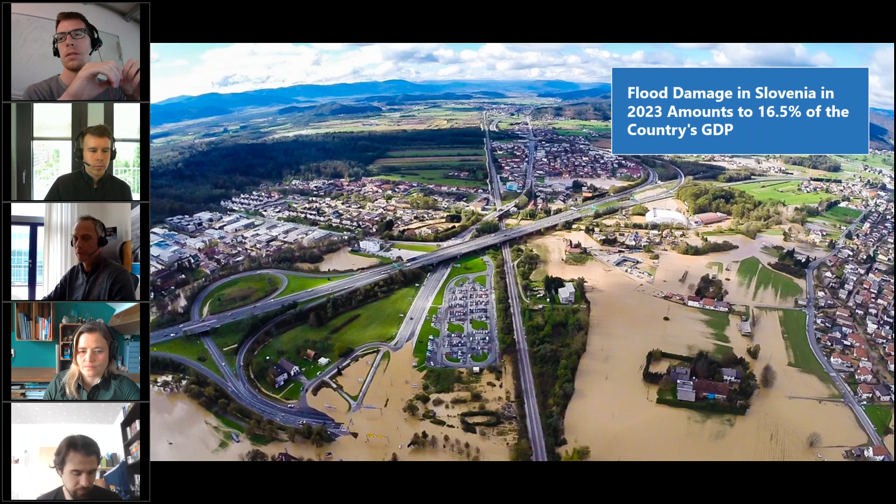And it's not just our Slovenian local challenge. You know that across Europe and around the world, extreme weather events are becoming more and more frequent, more intense, even more disruptive. And this experience motivated us to check how we can contribute actually in this field of flood protection. And we believe that the best way to move forward is by connecting expertise across multiple disciplines.

And this is why today's session brings together specialists in measurement technology, hydraulic modeling, meteorology, infrastructure design, and we want to share tools, knowledge, some real-world examples that can help all of us better prepare for future flood risks.

So I would like to welcome my colleague panelists, Tomáš Púčik from European Severe Storms Laboratory in Vienna, then Katja Weber. She's application development manager at OTT Hydromet, a company that designs measurement equipment. Martin Nagel, I hope I spelled correctly, Martin. He's a hydrologist and advisor at DHI. This is an institute that develops solutions for hydraulic simulations and applications. And then also my colleague, Jan Cunja, he's product manager for hydrology solutions at our company, CGS Labs.

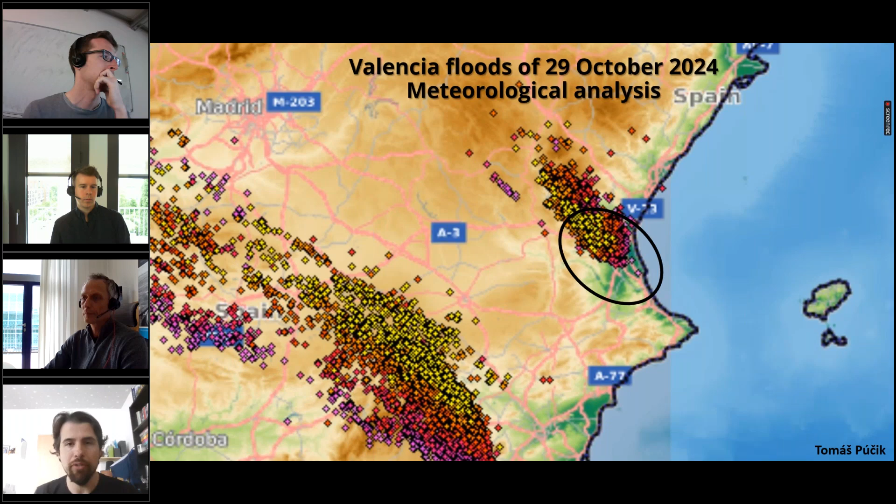And here what you can see is an animation of the lightning strikes over the course of the flash flood event. And these yellow crosses that you can see are the lightnings in a 5-minute period. And you can see how they are accumulating basically over one spot. So we had the storm residing over the Valencia area for several hours straight, a very intense storm. And then by the end of the animation, you can see that this storm begins to just very, very slowly creep out of the area, but it was hovering there for many hours.

But it was also during a prolonged amount of time, because in some of the storms, it rains very heavy, but not for a very long time. In this case, for example, in 30 minutes, there was more than 100 millimeters of rainfall, or 100 liters of water per meter squared. That's like an equivalent unit. In 1 hour, more than 180 millimeters of rainfall.

Now, what is tremendous about this, of course, is that if you imagine that there are many places in Europe where the annual rainfall is less than this, a majority of these 700 millimeters fell in a 6-hourly period. So imagine your annual rainfall falling in 6 hours of time. So that is something really, really incredible.

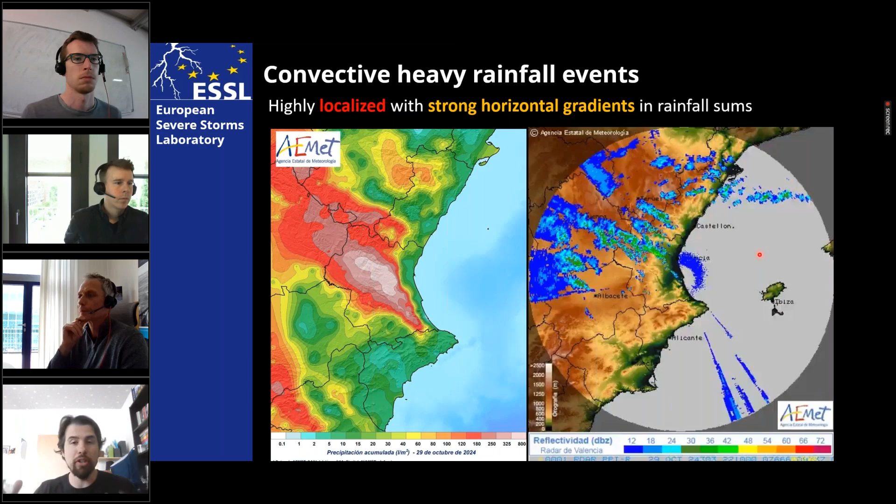Now here I'm animating a weather radar from the location, and you will see the development of this band of heavy rainfall over the area. And then you can see that first of all, it resides basically over one location, but also look how narrow the zone of the rainfall really is. So of course, if the rainfall moved 20 kilometers to the west or to the east, the situation and the impacts would be very different. They would move from one area to another.

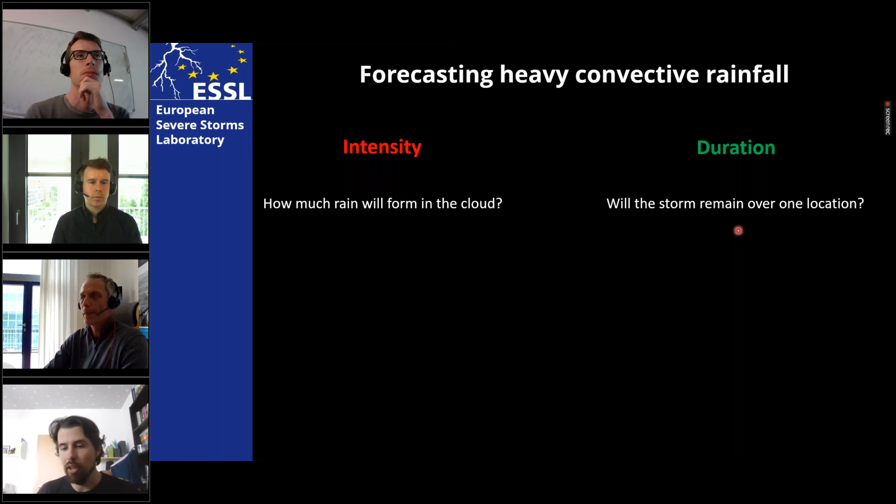How do meteorologists approach forecasting heavy convective rainfall? Well, we try to split it into two different components. The first is forecasting intensity and then the duration. So for the intensity, we are asking ourselves how much rain is going to form in the cloud. And for the duration, we are asking ourselves, will there be conditions that will enable the storm to remain over one location, so that a huge amount of precipitation can fall for a prolonged amount of time, so that eventually we are getting into these rainfall sums exceeding hundreds of millimeters.

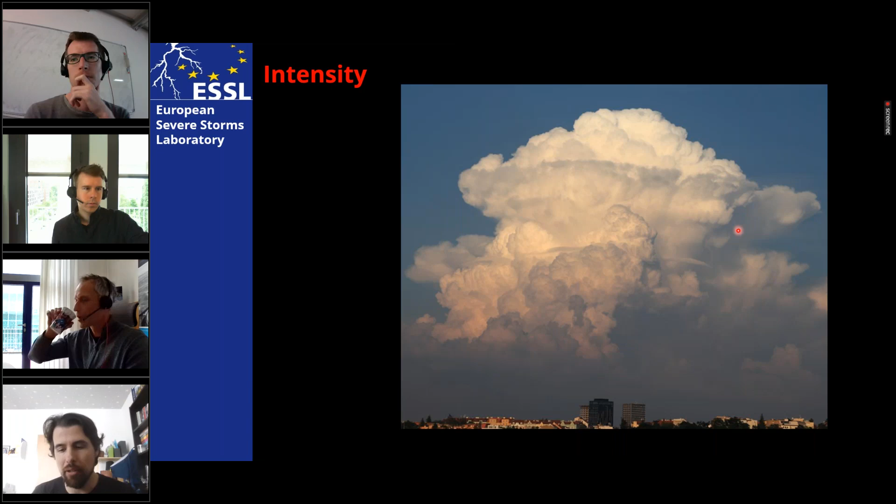Now, what about the intensity? So here we are looking at the photograph of what we call a cumulonimbus cloud or a storm cloud. And what these clouds are comprised of are very powerful updrafts. So there are actually measurements of the updraft speeds that are reaching 50 to 70 meters per second. So imagine the air in these storm clouds can rush faster than how you can drive on your highway.

Well, except if you're in Germany, right? Then you can drive very fast.

But the air really rushes up very fast upward in these storm clouds. So we flux a lot of water vapor up, and we can have really tremendously intense rainfall formation processes in this cloud. What will the intensity depend on? Well, first of all, there is some air flowing into the storm: how much water vapor availability there is in the inflow to the storm. So what is basically the water content in the air near the ground?

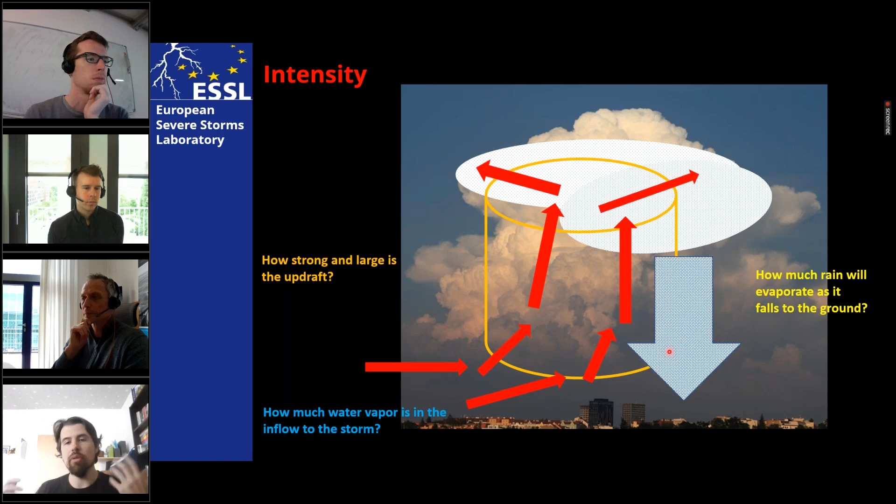Then how powerful these updrafts in the storm clouds get. So how much vertical flux of water vapor there is, and this scales both with the updraft speed but also the size of the storm overall. And the third factor is if the rain forms in the cloud and it starts falling to the ground, how much of it is going to evaporate. And let's investigate some of these things.

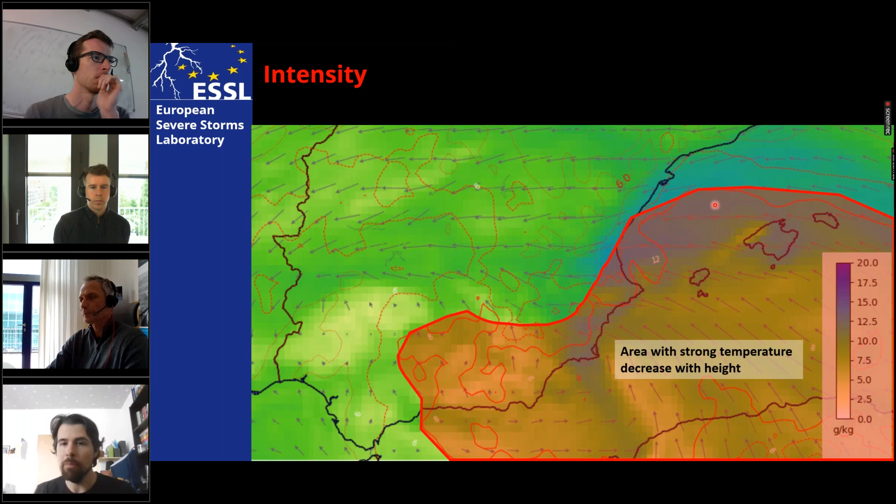Now, what we get of the combination of these two, of the moisture and strong temperature decrease with height, is that there is a high amount of potential energy reachable for the storm. So in meteorology, we have an index that is called CAPE, convective available potential energy, and there was really a lot of it for a long time over the Valencia region.

Then you see this orangish reddish area that you can see in here, and then we have this area that is sort of whitened out, and this is the potential energy that is not actually reachable for the storm. So there is like a stable layer or a lid that would prevent the storms from using that. So exactly over this Valencia region is where we had the best presence of available energy for the storms.

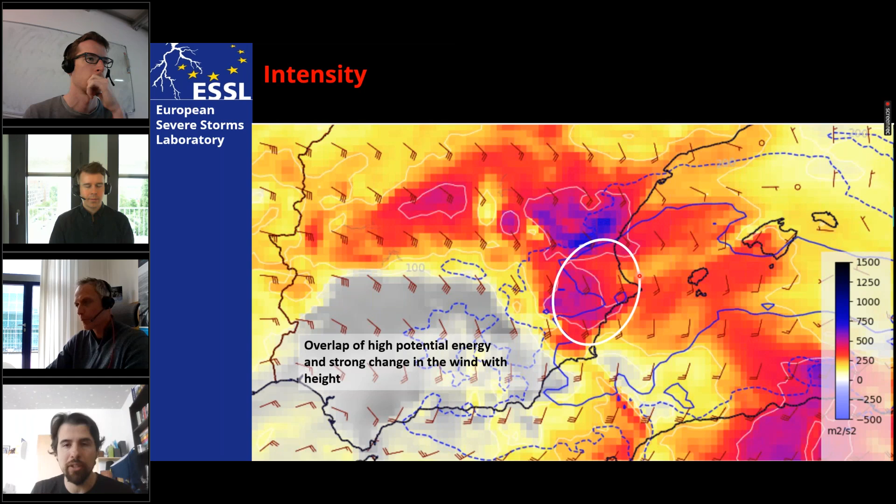And not just that, what we also got over an area was both this high potential energy for the storms, but also an index in these bluish reddish colors that shows that there is a lot of change in the wind with height. This is a condition that we call vertical wind shear, and it profits storms, heavy convective storms, a lot. And why is that?

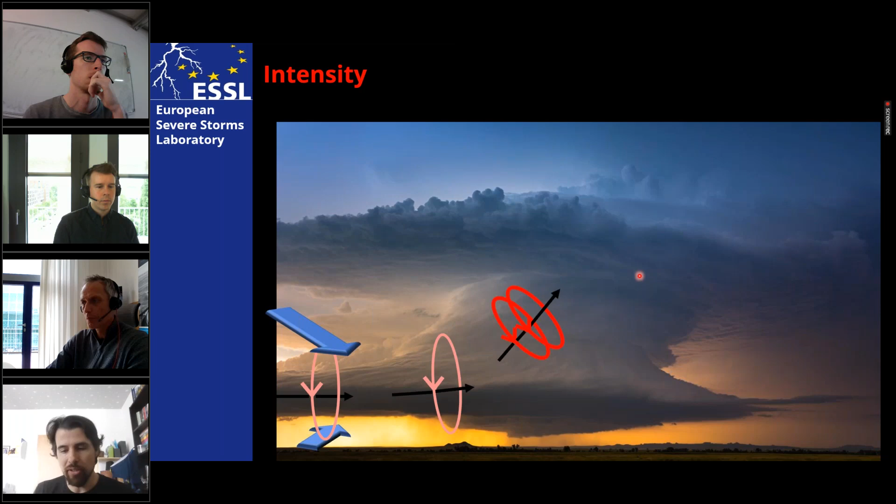This vertical wind shear creates a horizontal tube of rotation, a vortex line, that is ingested by the updraft of the storm, tilted in the vertical and stretched, creating sort of an ice skater effect. And this rotation in the storm is basically like a huge vacuum cleaner. It sucks up the air from below. So in the end, the updrafts of these convective storms, when we have rotation in the storms, are much wider and more intense compared to the storms that do not rotate. Once again, it's like a big vacuum cleaner when the storms begin to rotate.

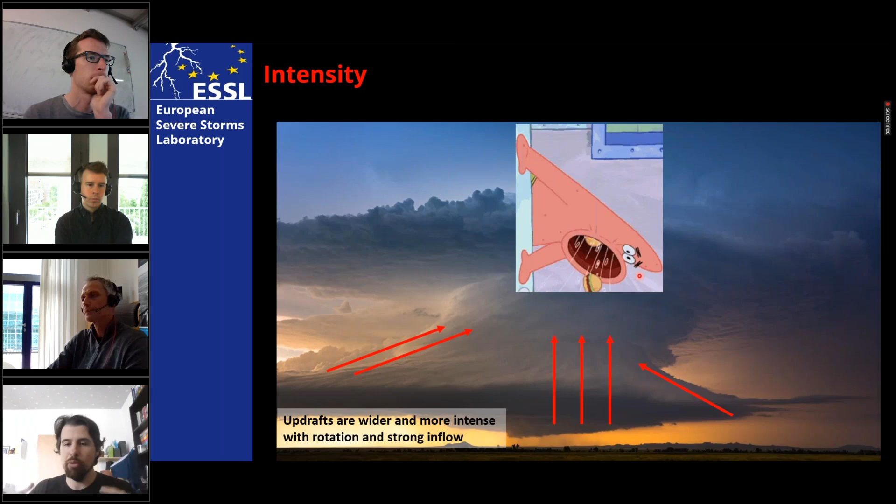So also there was very strong vertical wind shear in the environment, and the storms that were developing were really sucking up a lot of this moist air upward. So we had a tremendous vertical flux of the moisture. Now, what about the duration? That is a big thing. We had very intense storms. And now, what about the duration?

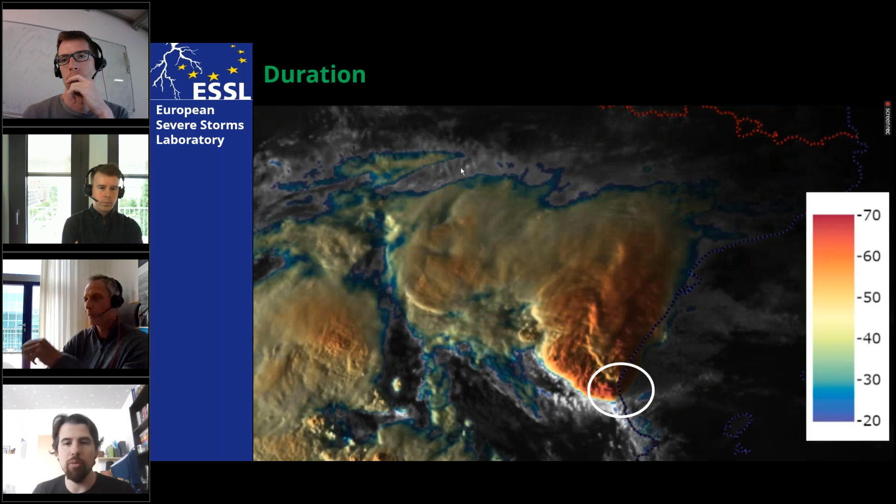So I'm now animating the satellite imagery where these colder colors represent very cold, very powerful storm tops. And you can see that the reddest colors stay precisely over the same location. I will animate once again so that we can get an overview. So once again, track the reddest color in here. So we see that the strongest updrafts in the storm were sitting exactly in the same spot for several hours. And this is what in the end made the situation so tremendously dangerous.

How do we get this high duration of the rainfall? There are a number of ways. One of them is whether we have these favorable ingredients for the convective storms or for this heavy convective rainfall remaining over one area for a prolonged amount of time. And this is precisely what happened. We have this flow of very moist air coming from the Mediterranean Sea over the area, basically for the majority of the day. And now let's notice the physical geography of the region.

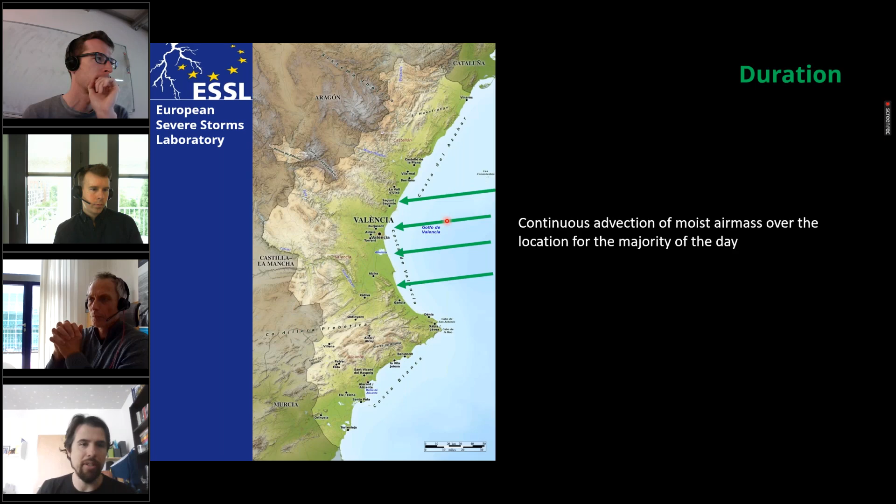So we have this moist air flowing towards the Valencia region, and of course we have local terrain. And what is especially important for us are these small mountain chains over here, because these actually started triggering the first storms, and then the storms that formed tracked over the Valencia region. So what happens? We have moist air coming towards the mountains, and the mountain is a barrier. So the air that approaches it has to go up. And as the air goes up, this triggers the development of the storm. As the air is forced to rise, this starts the release of this potential convective energy, and we get a storm. And it can rain over the mountains.

As long as we have this moist air flowing towards the mountain, the storm can basically hover over it for a lot of time. Or what we can get, of course, is the storm - because it rains and some of the rain evaporates, the air gets heavier underneath in this precipitation area, and it collapses down. This is what we call a downdraft in meteorology.

Some of this downdraft air can rush down the mountain slopes and out from the mountains. Now remember, we still have this very powerful flow of air rushing from the sea towards the mountains, and you can imagine what happens when this outflow from the storm hits the inflow from the sea. Because of mass continuity, we cannot send the air underground, so we have to create an updraft. On the zone of this low-level convergence, we have a cloud formation, and this serves as another trigger for the storm.

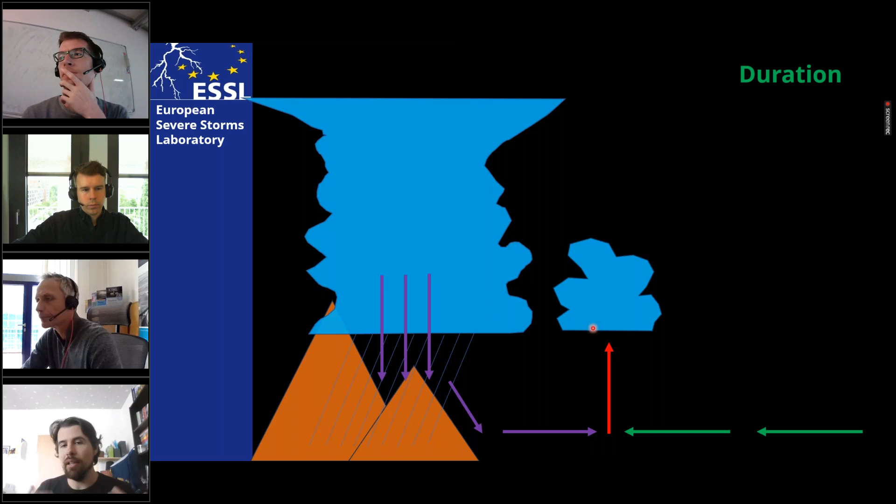If the wind direction stays the same and the situation doesn't change, and this trigger for the storm stays at one location, we will have this situation where we have the formation of new storms over this spot, and then the maturing storms with very heavy rainfall will continuously move from this spot over there.

If we have this moist flow of air, and if we have these convergence zones residing over an area for a couple of hours, then we are getting heavy convective rainfall for a couple of hours. And this is, by the way, precisely what happened in this situation.

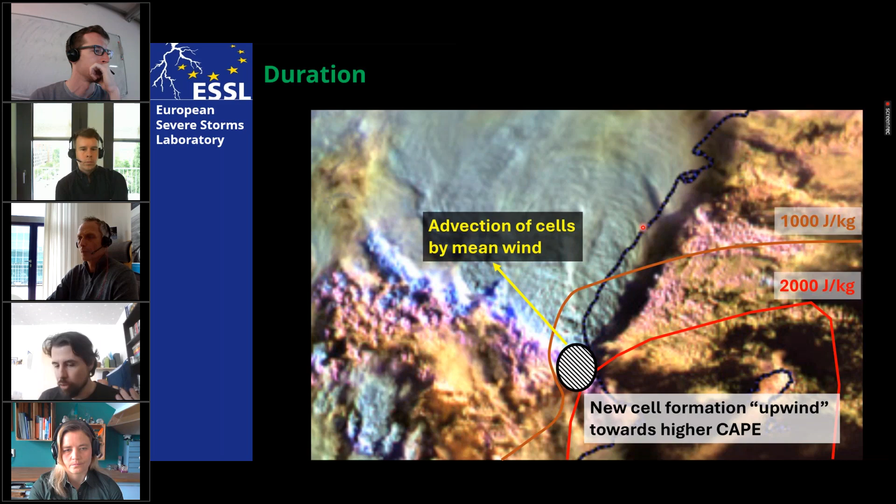So we had this air filled with high energy, 2000 joules per kilogram of convective available potential energy, or what we call CAPE, rushing from the sea, towards the Valencia region, and then the orography triggering the convective development at this spot for several hours, and then the storms being carried by the mid-tropospheric wind further inland and deeper into the mountains. But if the situation with the favorable inflow of air persists for many hours, then it will rain for many hours.

Now this is a bit more of a description of what kind of ingredients for heavy convective rainfall meteorologists would be looking at. So concerning the intensity, as we said, we are looking at the high water vapor content in the atmosphere. We look for sufficient energy to sustain strong updrafts. Then we look at whether we have strong vertical wind shear present, and the low cloud bases.

I can explain this for low cloud bases. This is important because if we have a very low cloud base, then the rain that falls out of the cloud base and heads towards the ground will have little time to evaporate. If we have very high cloud bases, like in some very continental clouds, then a lot of rain is going to evaporate on its way to the ground.

And then a high level of the 0-degree isotherm. That is quite interesting, but it is actually sometimes quite important, because the higher the level of the 0-degree isotherm is, the bigger the portion of the cloud where we will actually have a formation of raindrops. If the 0-degree isotherm is very low, then the storm will be in this very cold part of the troposphere, and instead of raindrops, we will be forming more ice crystals in the upper part of the storm.

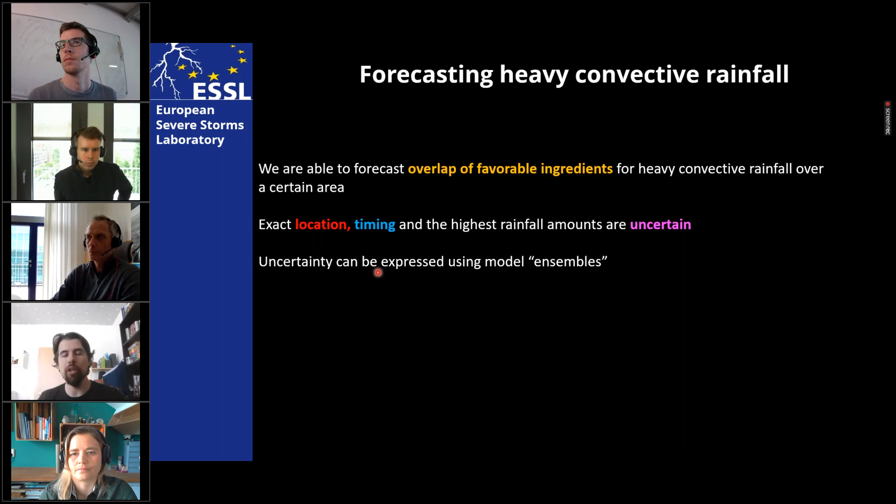What we are very good at nowadays is saying that this is a situation that may really produce very heavy rainfall. Okay, so thank you for your attention.

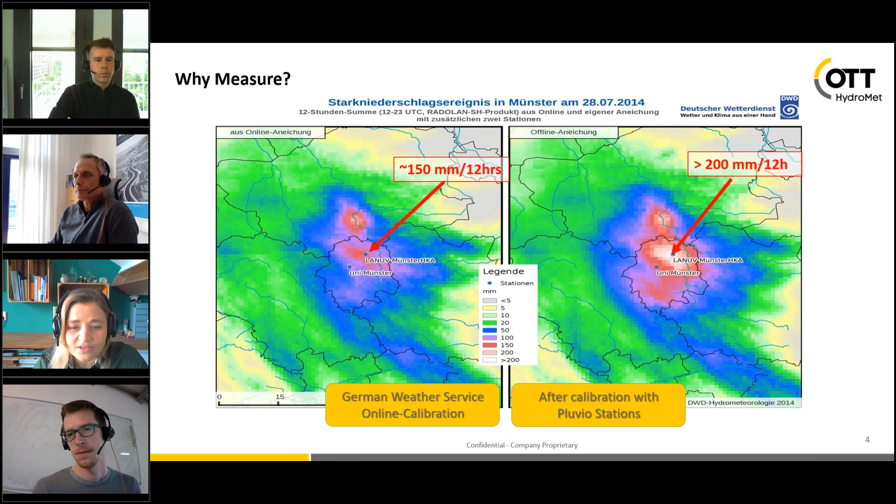This is a precipitation sensor with the weighing principle. I like to highlight the detail with the clothes in the background because there was a heavy rain event. People had to be out. So what actually happened in the end was almost 300 millimeters in 8 hours. That's quite a difference to what was forecasted. And that difference could mean that your emergency service would be completely surprised by what is going on.

I also have this nice example, since we might have people in the call that are not so familiar with precipitation amounts. Almost 300 millimeter means almost 300 liter per square meter. And this is what they put together here in buckets on 1 square meter to give you a visual impression of how much water that was in 8 hours. And if you think that you were about 100 millimeter off because you expected more than 200 and in the end it got 300, that would be almost a complete layer less.

Okay. And that amount of water would not stay on that square meter. That is the difficult thing about flood risk management. The water doesn't stay on the square meter where it's falling as precipitation, but it will move downhill, and at some lowest point, it may accumulate. And this is where you suddenly get a problem because you get a few of those layers more than you expected. So as I just said, that could surprise your emergency services, which would then waste potential time and resources in responses that are not actually fit to the amount of water.

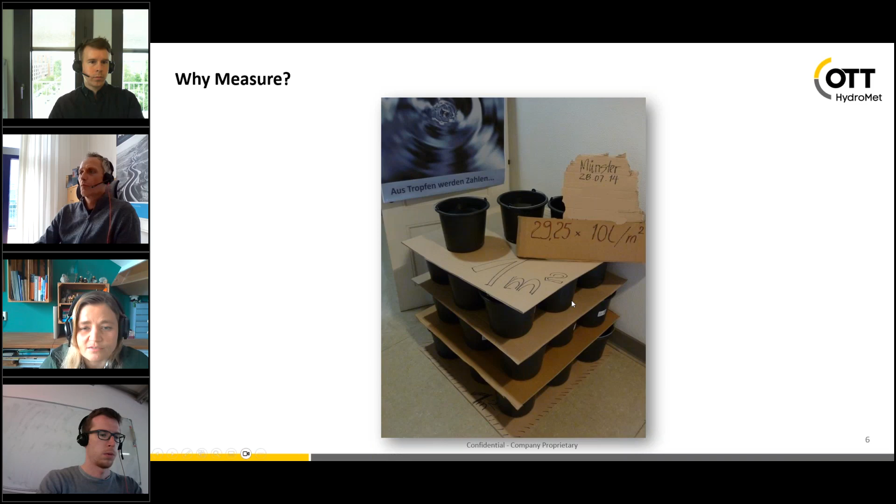Or think about insurance claims. If an insurance has to pay or not, afterwards they might say, yeah, but we don't have to pay because the event was not that exceptional. And if you can prove that at this specific location, it was 100 millimeter more than what they said in the forecast or what the German Weather Service predicted, then they will have to pay. But without the data that you measured, you might not be able to prove that. So there are a lot of reasons why it's important to have sound information.

So again, the best option is to use a combination of things to get the advantages of all the different systems and cover up for the disadvantages that they might have. It's a bit unfortunate that there's not one perfect solution, but that's why we're here today to talk about it. But let's start with some examples of what can you measure, how can we measure it?

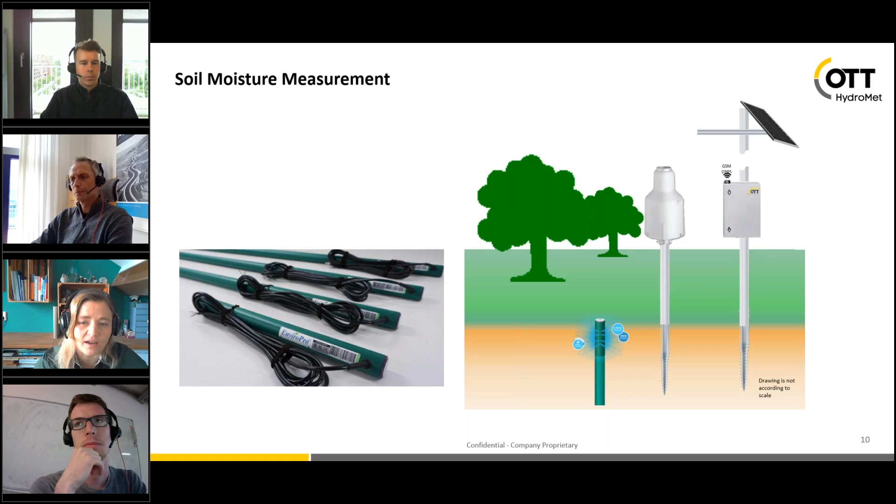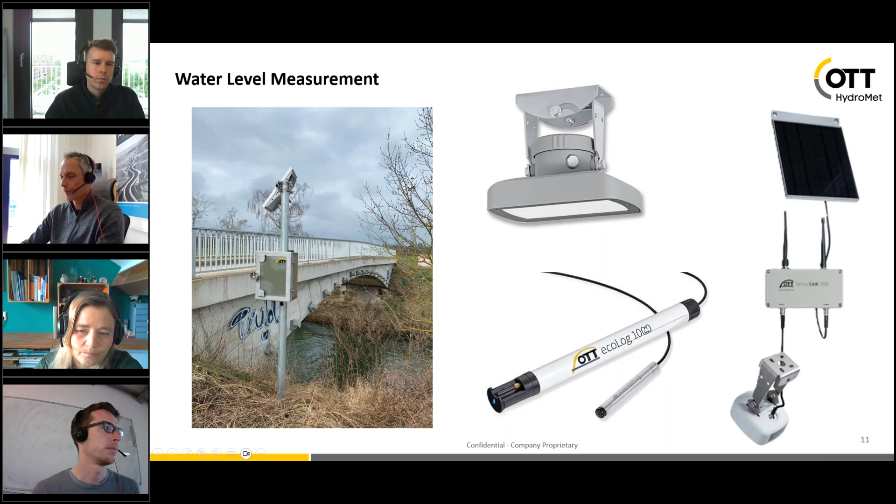So these systems are very compact, and they have the huge advantage of being compact and simple. They are ready to go. You don't have to plan anything more. They have the disadvantage of what you see is what you get. So if you want to add other sensors or anything, you can't do that. It's just this setup. But yeah, this setup is specifically made for basic water level measurements that you can install pretty much everywhere.

You can do it even more simply. If you don't want to use screw foundations, use a wooden pole. So you see, you just need to be a bit creative. All you need to manage is get the sensor into the water and make sure that the data logger part stays dry. These are the two important things. For the rest, you can have a lot of ideas how to install that and how to mount that.

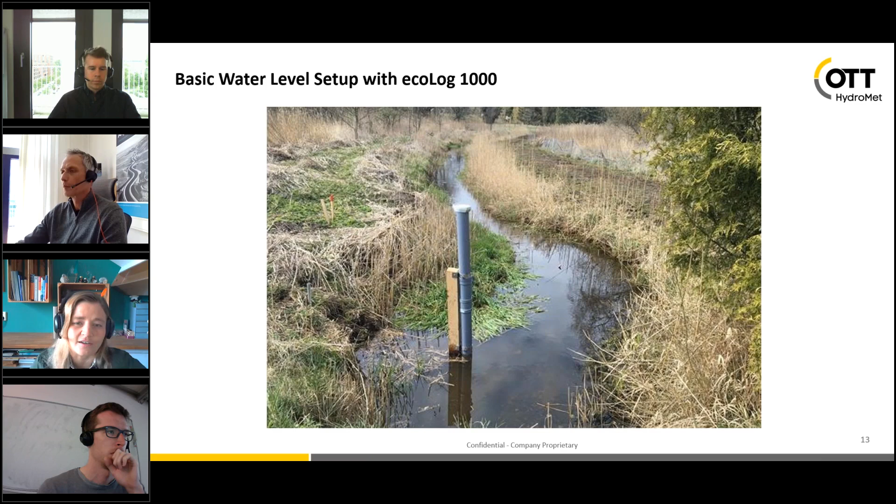So the sensor needs to be over water. The rest could also be installed somewhere else, wherever you would want. So that is really a high flexibility. This is then easily accessible for maintenance, for example, or for installation. And sometimes you might even want the camera.

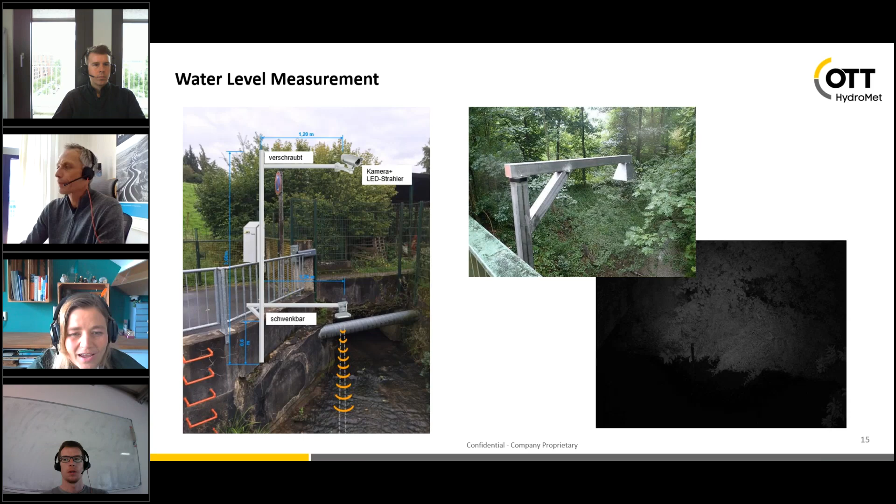And we again have a radar sensor. A rain retention basin usually has an outlet. And you see we have one station on the inflow side of the outlet and one station on the outflow side of the outlet. On both sides, we would measure the water level. And in a heavy rain event, on the inflow side of the outlet, we would get a high water level because the retention basin gets filled.

And then they would also see what is happening on the outflow side. Do we still have outflow, or is the outflow potentially blocked? Because what you usually have is these racks in front of the outflow so that they don't get blocked that easily. But even these can get blocked with debris that is coming along, and then the water can't get out of the rain retention basin. So this is an actual camera picture of one of these two cameras that you just saw in the photograph.

And with that, they can check the situation at their rain retention basin, and they will know if they have to respond, if they have to go there to potentially clean that, if it is safe to go there, if they have to take specific material like heavy machines to be able to clean that. They will exactly know what is going on here and how to respond. And you could also have the same system for blocked culverts that go underneath a road, right?

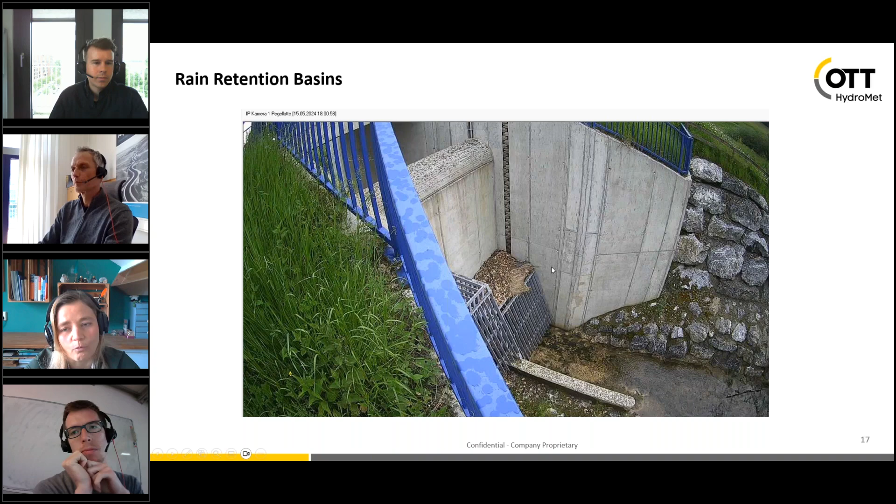Otherwise the road might get flooded because the culvert is blocked and the water can't go through. If you see that in time, you measure a water level upstream and downstream of the culvert, and with that you could respond, get a camera picture, see what's going on, and see if it is worth sending someone there to clean it or not. So that is a very specific application we use quite often, and I thought it would be nice for you, just as an inspiration: where could it actually help? Which benefits do we gain?

Now, the main takeaway that I want to have for you is A, measurements are important to make informed decisions. So don't push them away. They are important and you will need them. The second one is that there is not the one solution, so you will always have to plan it. But many things are possible and not even that complicated. They might seem complicated for you, but for us, it's our daily business. So just ask us. Most likely we are able to solve it, and it might just be a blink of an eye for us because we do it on a daily basis.

So I'm sorry that I went a bit over time.

I hope you forgive me. Thank you, Katja. We'll hurry up to our next presenter.

Switzerland is often called the water castle of Europe, as it includes many lakes and rivers. These lakes have multiple roles, such as water supply, hydroelectric power generation, tourism, transportation, or biodiversity. Some lakes you might know are the Lake Zurich or Zürichsee, the Vierwaldstätter See close to Lucerne, the Neuenburger See, or the Genfer See near Geneva.

What some of you maybe don't know is that most of these lakes are regulated. This means it is predefined how much water will be released, taking into account natural fluctuations, as well as the needs of different stakeholders.

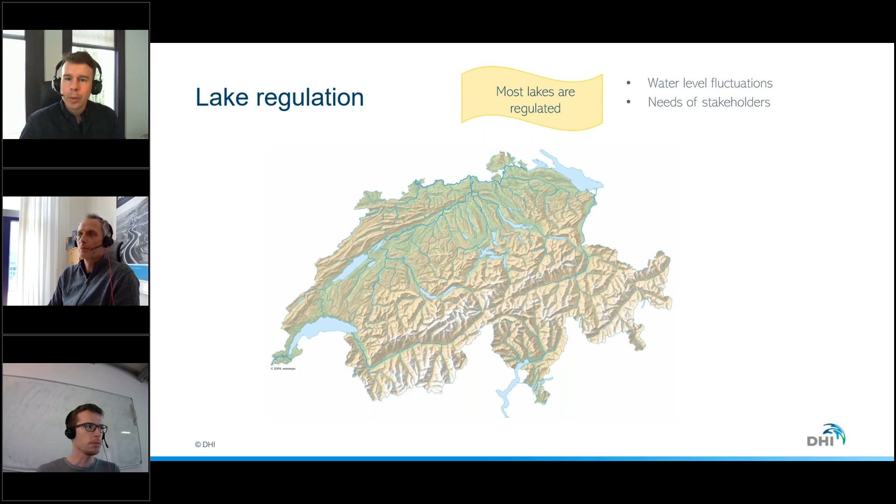Now I'm giving two examples. First, the Lake of Zurich. The regulation happens around two kilometers downstream at the river Limmat. Based on the measured lake level, the flow through the weir is predefined in the rules of regulated discharges. This was historically set up for shipping purposes; however, nowadays it is much more complex and tries to satisfy different needs.

The second example, the Lake of Biel. It is an important lake as two upstream lakes and about a fifth of the area of Switzerland drain through it. Depending on weir regulation, water can flow even backwards into a much larger lake called Neuenburger See. So in total, around two-thirds of the area of Switzerland drains through regulated lakes.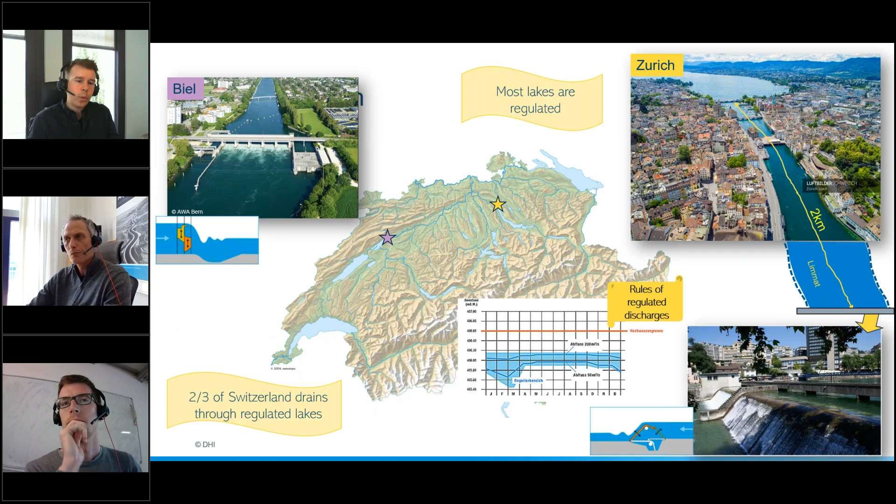So let's look at how these lakes are managed in Switzerland. There are two levels, the cantons and the federal authority. Switzerland has a federal system of government with 26 states, called cantons. The management of these lakes is the responsibility of cantons, and each has their own management strategy, one example being the rules of regulated discharges we just saw.

If more than one canton is impacted by the regulation, there are intercantonal agreements. On top of these cantons sits a federal authority for the environment, the BAFU. According to law, the BAFU has overall supervision of the lake regulation, and in emergency situations it is responsible for flood warnings and has a say in the deviation from discharge regulations for many lakes.

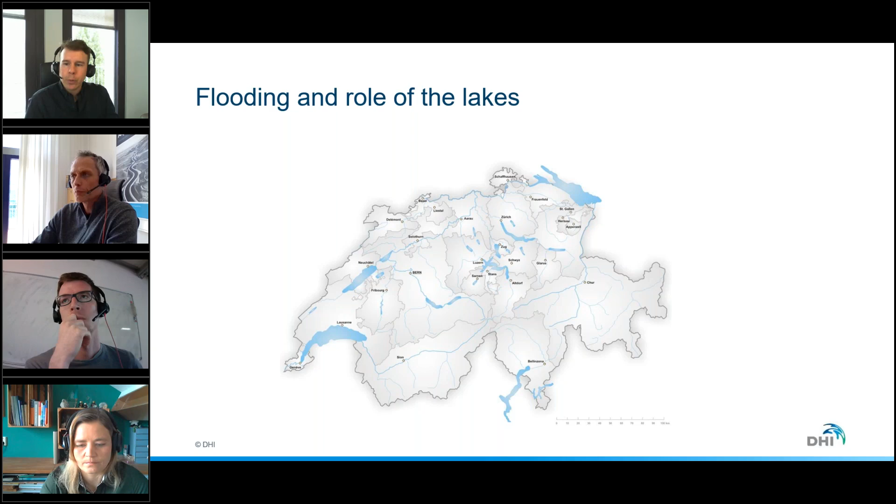There were some big rainfall events in Switzerland in the past, which led to flooding and severe damages. The biggest impacts were seen around the lakes at the northern verge of the Alps and along downstream rivers. After analysis of flood events, it was found that the regulation of these lakes can play a crucial role, because the timing and quantity of lake outflows can influence the magnitude of damage.

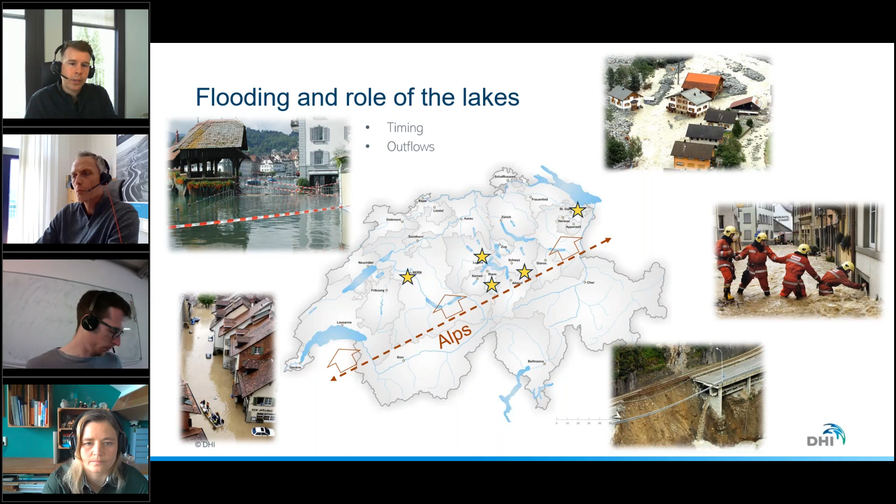For example, in advance of a potential flood, lowering the lake level to gain additional storage volume can help reduce the near-lake and downstream flood risk. As the crucial role of the lakes was understood, the BAFU identified a need for operational flood management. Many lakes are connected through rivers and canals, and the forecast of magnitude and timing of flows can become complex.

I'm giving one example that shows the complexity around the Lake of Zurich and the need to look at the system holistically. Here's Zurich at the bottom, with the downstream weir over the river Limmat and a big catchment upstream which drains through this weir. But it's not only the Lake of Zurich which contributes, but also a second lake further upstream called Walensee, connected through a canal and located in different cantons, St. Gallen and Glarus.

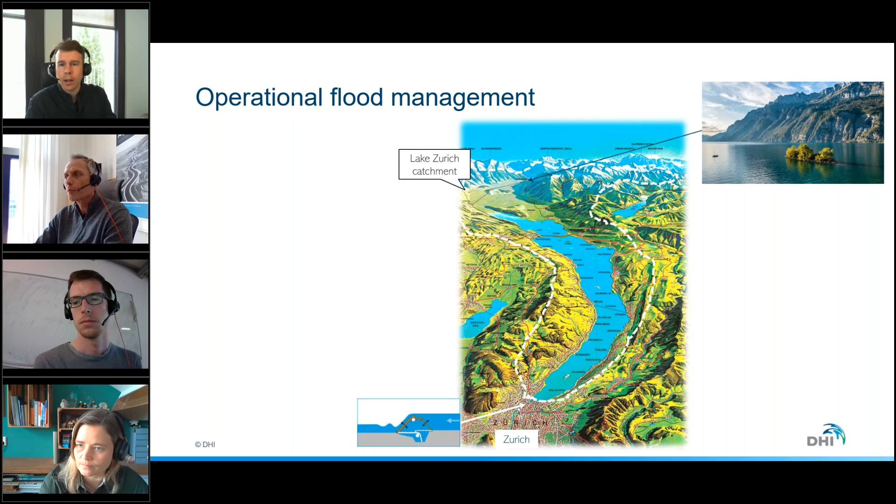Right downstream of the weir is a junction of the Limmat with its largest tributary, the river Sihl, which has a significant, almost alpine catchment. This means river levels can rise very quickly, conveying a lot of water into the Limmat that can lead to further flood risk in Zurich and downstream. To dampen the peak in the river Limmat, the weir can be increased, meaning the Lake of Zurich holds water back.

Now, if we travel downstream along the Limmat, we meet the river Aare, and this Aare gets lots of water from other cantons, for example from Bern and the region around Bern. So any hydrograph we see here is partly an outcome from the regulation around the Lake of Zurich, but also at different regulated lakes around Bern. So you can see that we cannot just look at one canton or lake in isolation, but need to look at the entire country. So holistic lake outflow management becomes crucial for countrywide flood management in this case. And that's why we identified the need for operational regulation and forecasting and engaged my company, DHI, to develop such a system.

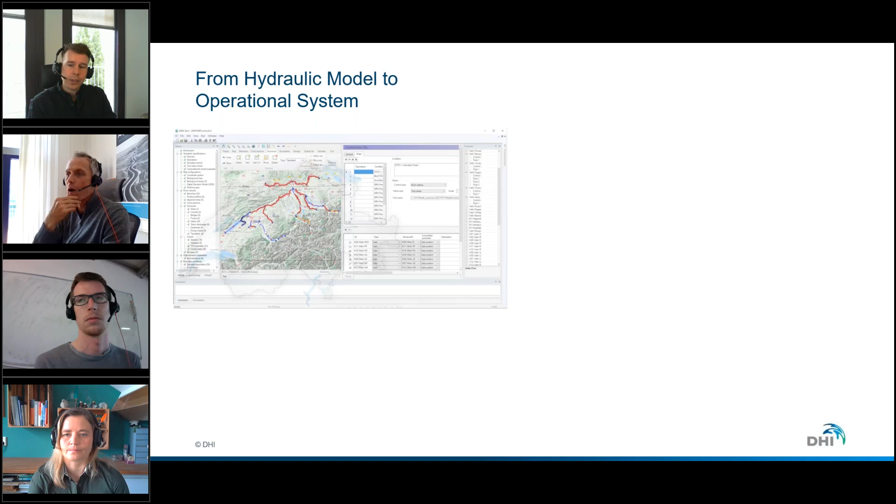So the start of the operational system is a 1D hydraulic model. It includes regulated lakes and downstream rivers. Lake regulation has been implemented as gate structures with specific control rules. This hydraulic model was then integrated into an operational system, ultimately being one of several components. Over time, a powerful decision support system was established, making continuous predictions of water levels and flows for the entire country up to 10 days in advance. There's a back-end component called MIKE Workbench, which is mostly handled by me and my team, and a front-end component called MIKE Operations, which is mostly used by the BAFU. And of course, everything is connected through a database.

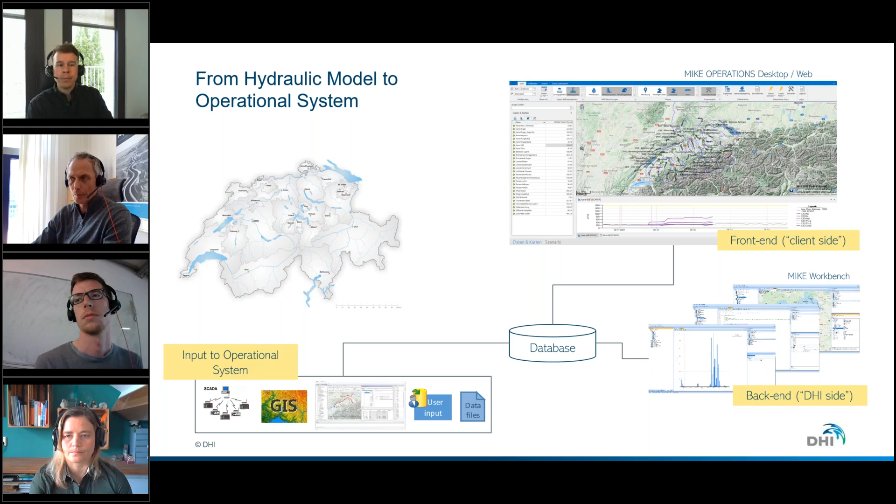So the system includes many workflows we call jobs, which run at specific time intervals. The main job currently runs several times a day and includes many different tasks related to data pre-processing, model runs based on different weather forecast data, and model result post-processing. There are many other jobs like database maintenance, backup, and log file exports, or the sending of alert emails. Everything is tailored to BAFU's needs with inbuilt tools and multiple of our own Python scripts. There's the option for the BAFU to run scenarios for every lake release, as well as giving other stakeholders access to parts of the system.

The current role of my team in this project is to ensure that all workflows and simulations are operational at all times, and also on all three servers. We have a developmental system, a test system, and a production system. And in addition, we are currently expanding and improving the system. So for instance, this year we are planning to add more lakes and hydraulic features to the system, and we are also improving the workflows and data quality constantly.

The BAFU uses the system on a daily basis. If there's no flood event, it is used to check the current lake levels and forecasted inflows and anticipate possible floodings. Before a forecasted flood event, the system is used to assess the impact of lowering the lake levels, and different scenario runs support the decision-making process for weir releases. During a flood event, flood alerts are updated based on the model forecast. And then, after a flooding event, alternative scenarios are run and further analysis done since data and models are continuously backed up. The system can also be restored at a past point in time to check certain data points.

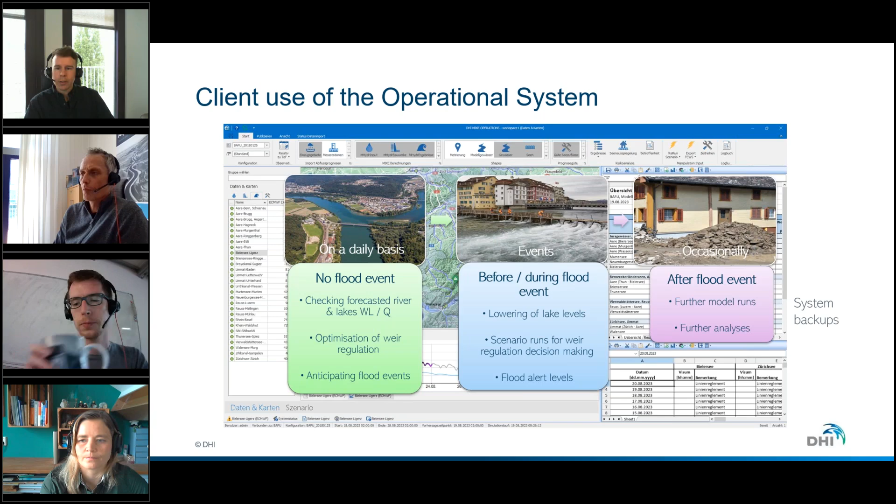So as a summary and outlook, first I want to say that the operational lake management system offers the BAFU a tool for improved lake control and flood management. Next, the system started as a relatively simple 1D hydraulic model and over time became a fully automated decision support system, providing countrywide forecasts and managing as well as visualizing various water data. The system enables the BAFU to support the cantons in crisis situations with advice on optimal lake releases that minimize the impact in the overall system. More stakeholders will be trained in using the system, and the collaboration with BAFU will go on for many years. We have a long-term contract, and we are constantly brainstorming together which new features and improvements we could implement.

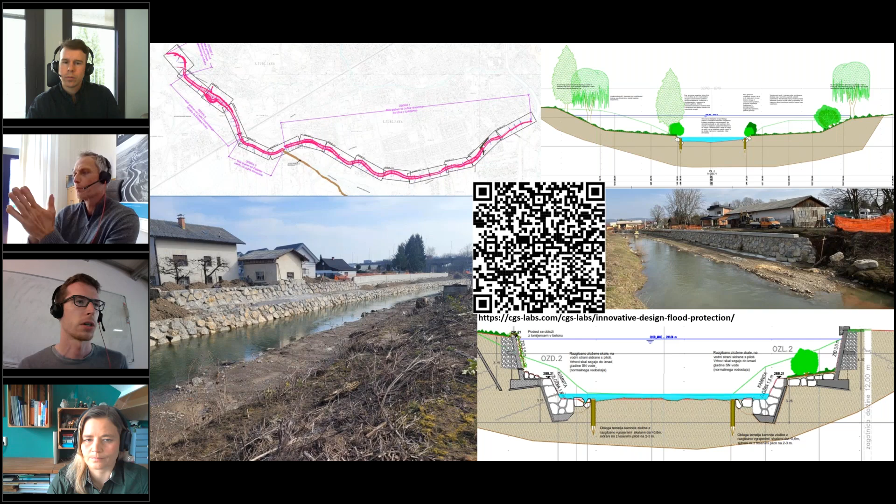So here are a few samples of layout and cross sections. If you scan this QR code, you can learn more about this success story and also find other customer stories on our website.

Aquaterra is primarily used for river and channel design, flood protection design, torrents and landslide control, and river restoration. However, it can also be used for open channel irrigation systems and earthworks.

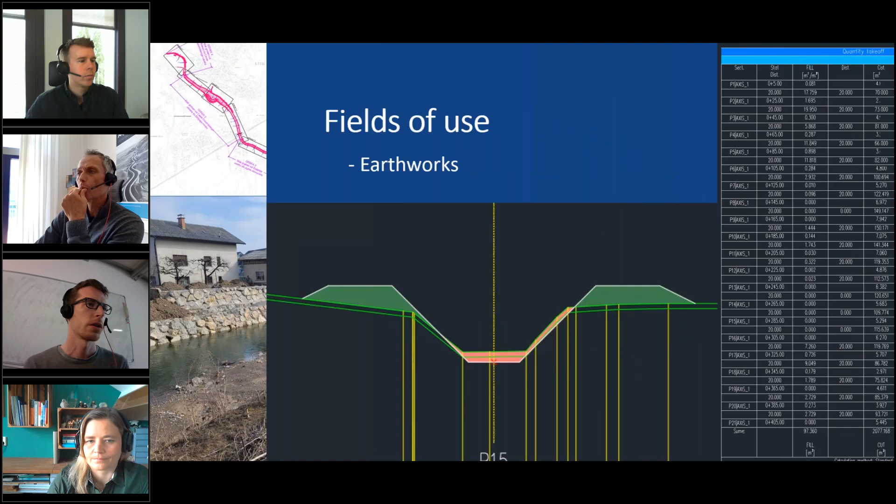So you're able to calculate quantities like materials in cut and fill, and do this section by section. You can also create a summary table, as you can see in the picture.

Now I will show you the basic workflow in Aquaterra and how to design flood protection measures with it. If you're just starting with Aquaterra and need a detailed step-by-step workflow to learn the basics, you can watch our online Aquaterra training course, which is free and available if you scan this QR code.

But today we will go a bit faster through these steps. We will first create the river model in Aquaterra. Then we will export this model to HEC-RAS. You can also do it with Mike, but today we will only show it in HEC-RAS.

We will perform hydraulic analysis there, then design a new river channel in Aquaterra according to the hydraulic analysis. We will define a new riverbed, design new terrain in cross sections, and add a dike. Then we'll export this designed model to HEC-RAS again, do the hydraulic analysis again, and import the results back to Aquaterra. So this is the plan, and let's start with this first step.

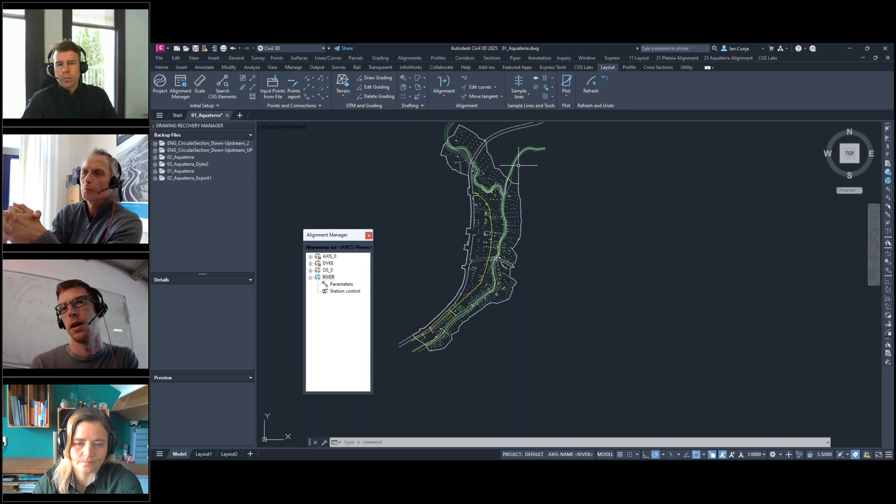Let's create the river model in Aquaterra. So here I have some river alignment that I drew with a polyline. With Aquaterra, you can just use the polyline-to-alignment tool to create a longitudinal alignment. Now this alignment corresponds to the river alignment in the alignment manager, because I selected it.

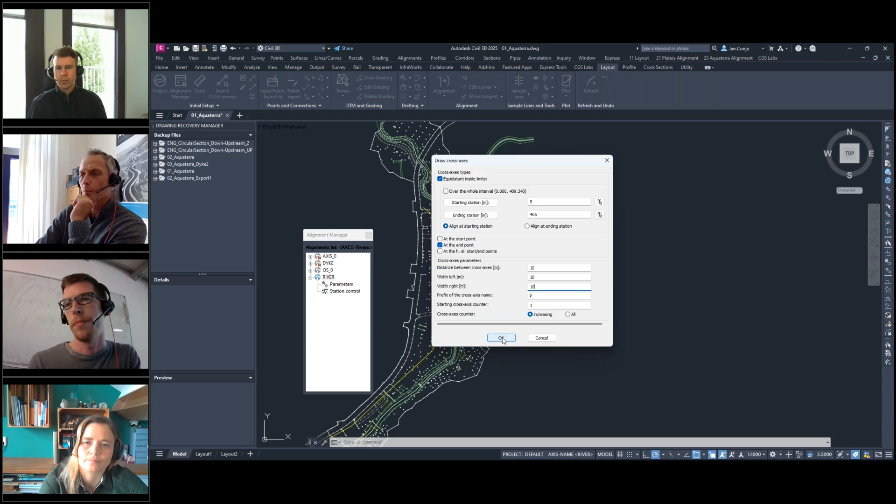The next step would be to create some sample lines like this. You can change the starting and ending station, and then define the width of the cross axis and the distance between them. Let's just change the scale of these labels to get a better view.

Okay, and now we have this alignment and sample lines. Those are actually placed on elevation zero, and we want to drape them to the surface, but first we need to create it.

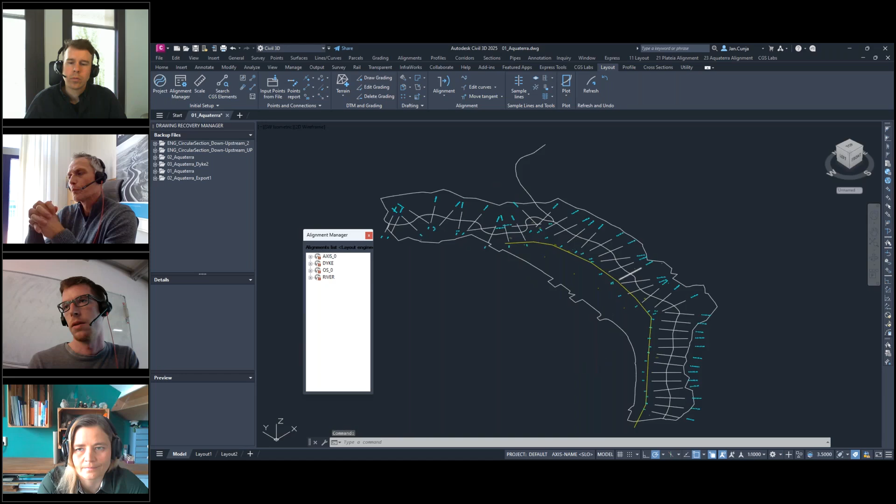Here we have some 3D points and 3D polylines, which are a result of geodetic and bathymetric survey, and from this we can create terrain. We will also add some LIDAR points just to get a bigger area covered.

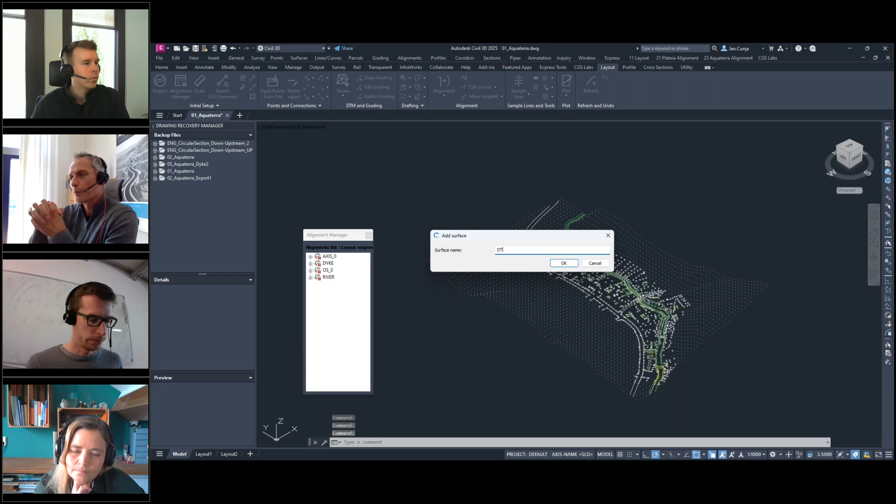I will just hide those attributes. So these are the points which we can use now to create the DTM terrain. You just select all the data that you want to use for creation of the DTM, and then you can represent it with triangles or contours.

So now we have created this terrain, but I will just hide the triangles so the model will work a bit faster. Now we have created the DTM with Aquaterra, but you can also use BricsCAD or Civil 3D surface with Aquaterra.

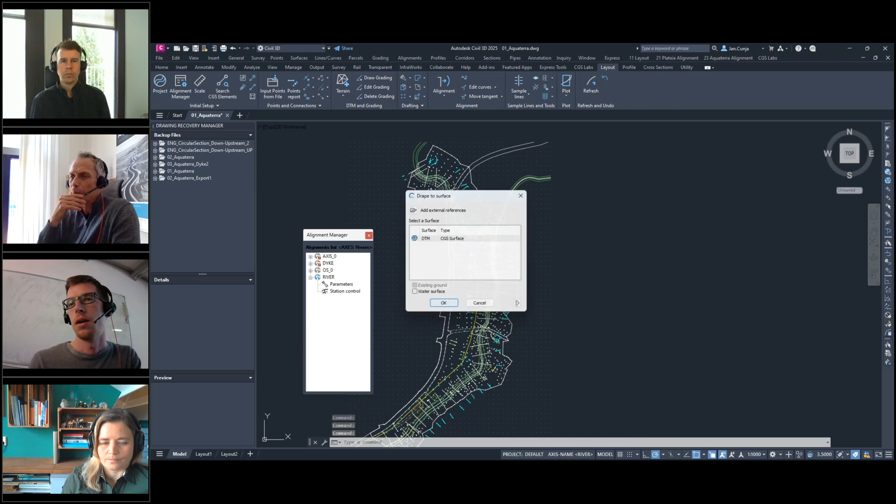Okay, so let's go to the top view, and now we can drape the lines—sample lines and the longitudinal line—to the surface. What happened now is those zero elevation lines came up to the surface, and now we have them here.

Now we can draw the profile view, and we will get the elevation of the riverbed here in the profile view, and we can also add cross sections.

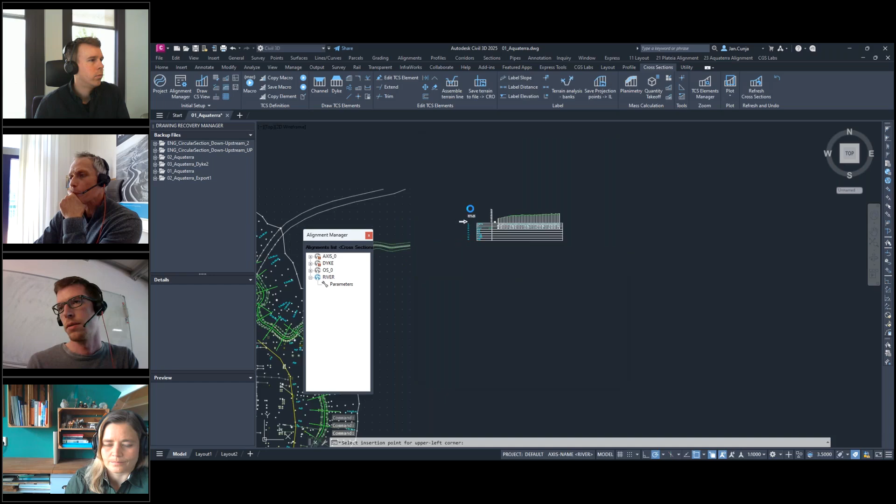Like this. So now we have geometry of cross sections, and we also have the alignment, and we can export this using our function export to HEC-RAS. So if you look now, we go to the second step. We will export the model to HEC-RAS and do the hydraulic analysis there.

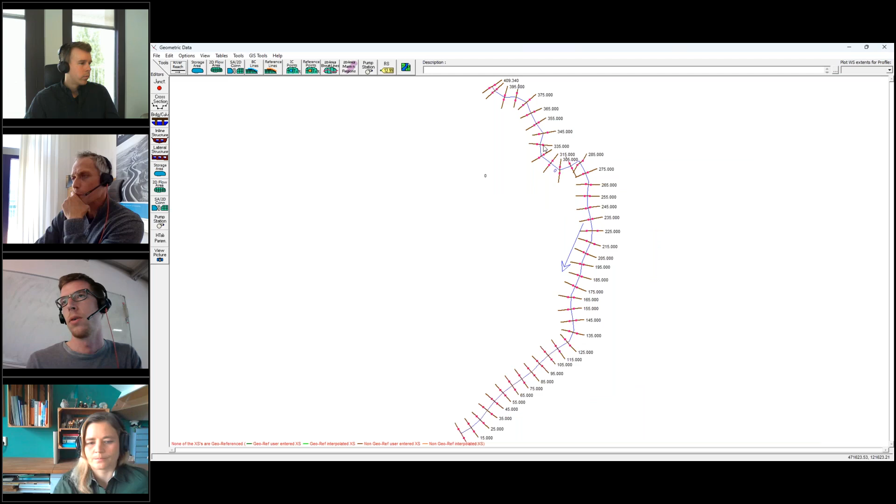Just to show you how you import the Aquaterra geometry, you just go to File, Import Geometry Data, and select HEC-RAS format. And then this G00 file will get exported from Aquaterra, and you can then check if everything is all right and finish to import data. And now you can see cross sections and the alignment in HEC-RAS.

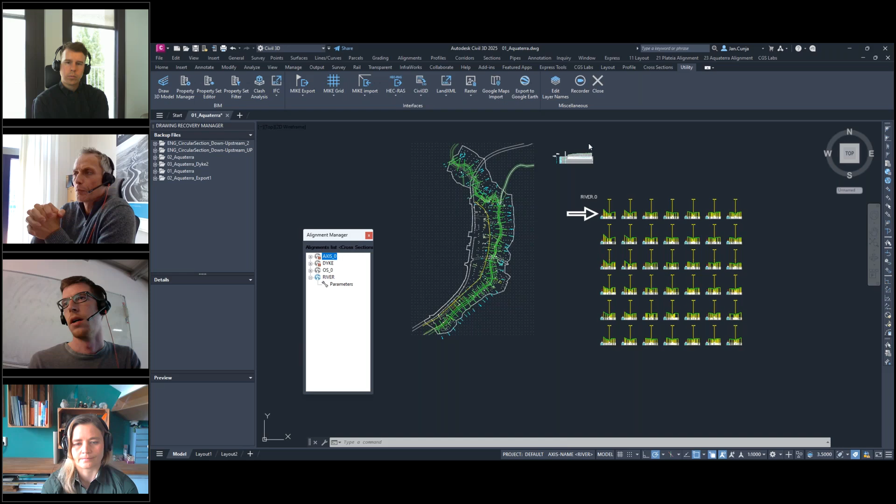So what we want to do now is to go back to Aquaterra and design a new channel. So design a new riverbed in profile view, and then also design new terrain in cross sections. And we will also add a dike. I will show you how to do it in a moment. So now here we can add a deeper riverbed with a draw profile view. You can just draw it, or I have saved this profile of this new riverbed, and I will just add it here.

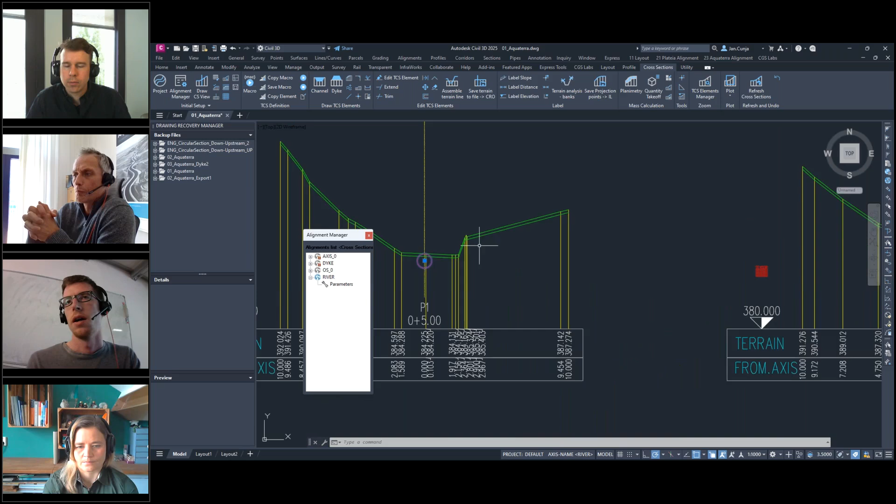So this is our new deeper riverbed, and we can add it to cross sections with this insert profile option. So now we get this point, which is an elevation of this line actually in cross sections, and we can draw some cross section elements. And in Aquaterra, you can use cross section elements that are typical for river regulation. For example, you can add channel or dike or embankments.

So if I just show you how to do it, you have all the parameters here. You just set them. You can see in the picture which parameter you are setting, and then you can also select on which cross sections you want to add this typical cross section element, and then you click OK, and you will see that this element gets drawn on all the cross sections that I have selected.

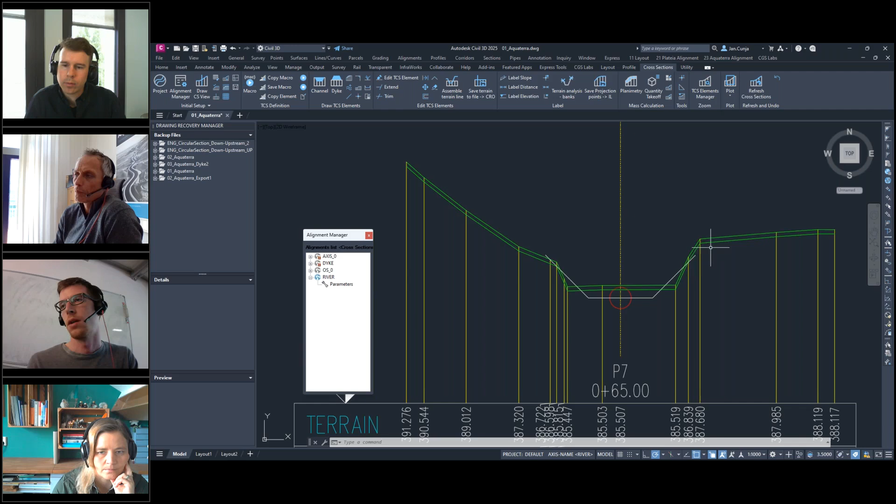And I can also add a dike, for example, here, and it also gets drawn on all the cross sections, except from when this is lower than the terrain, because here we want to actually draw embankments. We want to draw them in cut, so I will do like this. And this is how you can add elements on all the cross sections, which makes your process faster.

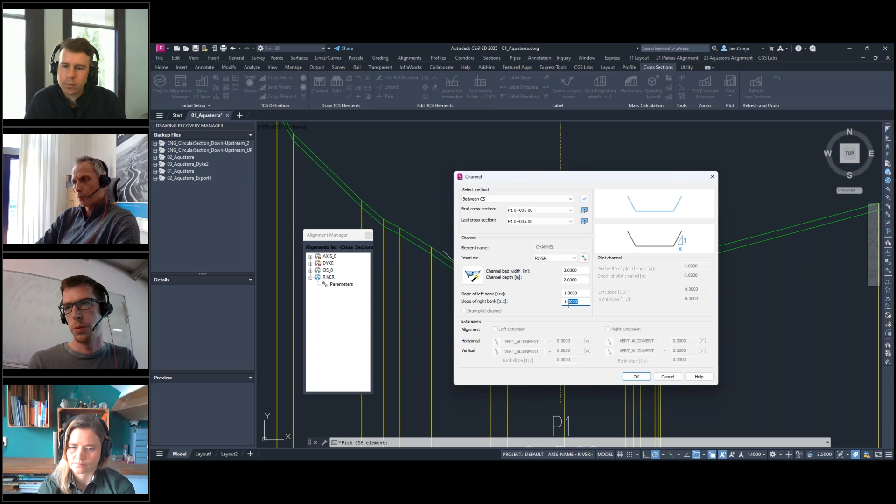You can also edit these elements if you select it, and then here you can change the slope of this embankment, so it changes. And because I have selected only this cross section, it will change only in one, but I can also select more.

Then you can also save this typical cross section, this regulation that we just did. We save it as a macro, and then you can load this macro, and I have pre-saved a macro here. So I will show you how this is done. I want this to be put on all cross sections. So I select this one, and then this regulation that I already pre-prepared is done on all the cross sections.

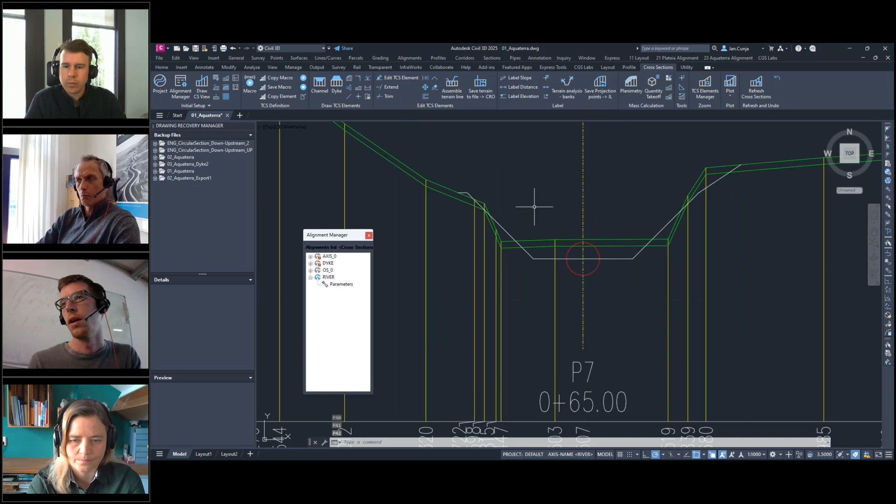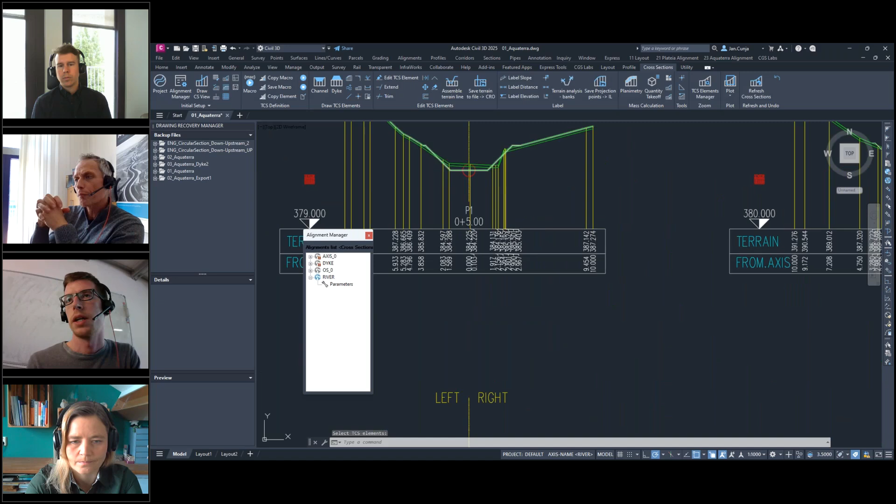Okay, and now what we have to do is to assemble a new terrain line, because we want to export this new terrain to HEC-RAS. You just select all the elements that you want to include. So we want to include channel, left and right dikes, left and right embankments, and I will name this new terrain. And now this new terrain is created on all the cross sections, as you can see.

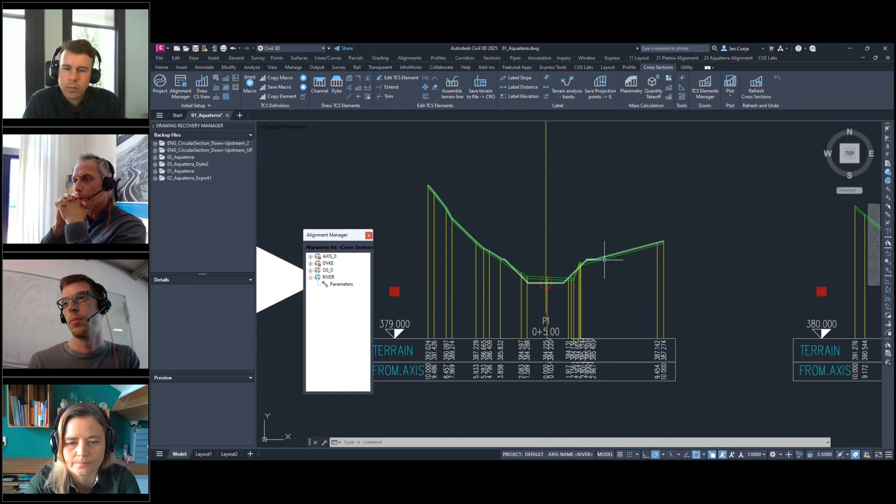So another thing that we want to do, so we have now made this riverbed deeper, and also we have changed the profile of cross sections to be a bit wider, and now we want to also add a dike on this line here. And to do this, I only have to add a new axis, and I will name it dike. And then I will do actually everything I did for the channel, but I already have prepared this so we don't lose time.

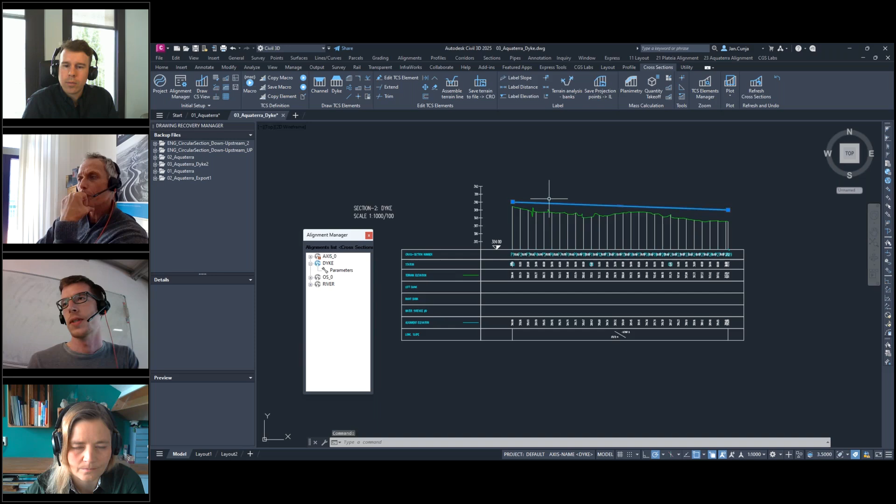So what I did is actually I just have made cross sections, I mean sample lines. I draped everything to the surface, and then I made a profile view with this line representing the crest of the dike, and this is this point here. So this will be the crest of the dike.

And I will also draw. Wait just a second. Yeah. So I will draw the dike here. I will use this TCS dike. Again, I prepared this macro in advance, so I can now just run it here.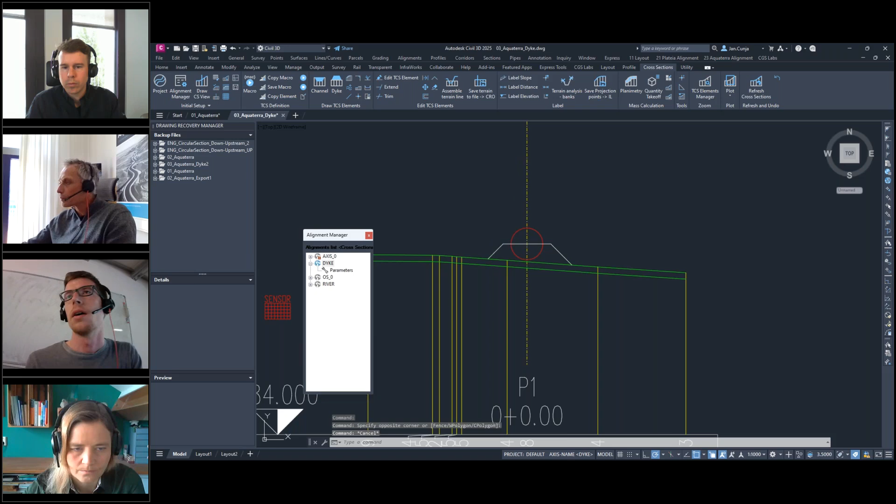Okay, so now we have a dike here, and actually we have everything we need to go back to HEC-RAS, but there is just one more step I want to do. So I want to show you how to put this dike in HEC-RAS so it becomes part of the terrain.

So to do this, we will create again the new terrain line. We will select this dike, all the elements, and this will be named, and now, because I only want to include this part of the terrain, I will use the trim command. This trimming command only works on the cross sections of Aquaterra, but when you use it, it will work on all the cross sections. So you only need to do this on one, like this.

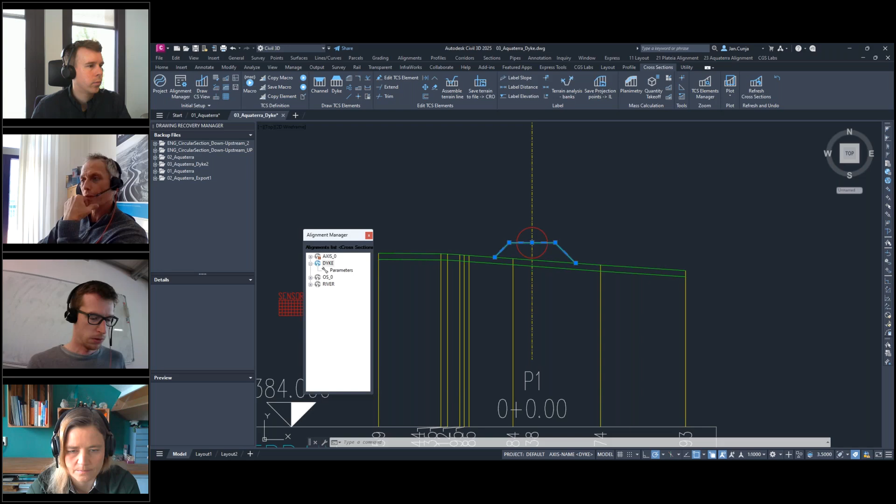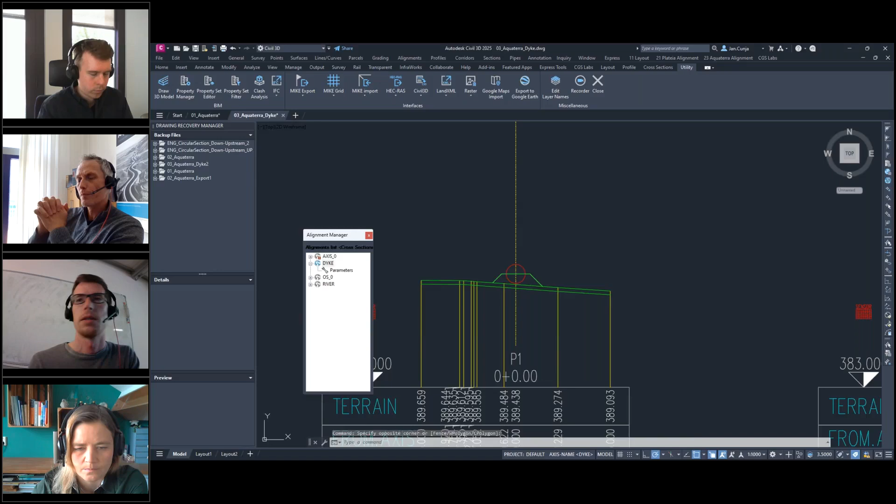Okay, so we only have this part now, and as you can see, it's on all the cross sections. And I want to now export only this part of the terrain. I will do it again with HEC-RAS, export to HEC-RAS. And let's see where we are now. So we have added all these things, and now we will export the designed model to HEC-RAS. So just to show you first how you create a terrain including the dike.

So you would import the dike using import geometry data, HEC-RAS format, as we did before for Aquaterra, and you will get the alignment with cross sections of the dike. And then you will go to RAS Mapper, where it is possible to use export layer, to export these cross sections and alignment to GeoTIFF. You save it as dike, and then you can create a new HEC-RAS terrain. You select the plus button and you just select dike, and you will get something like this.

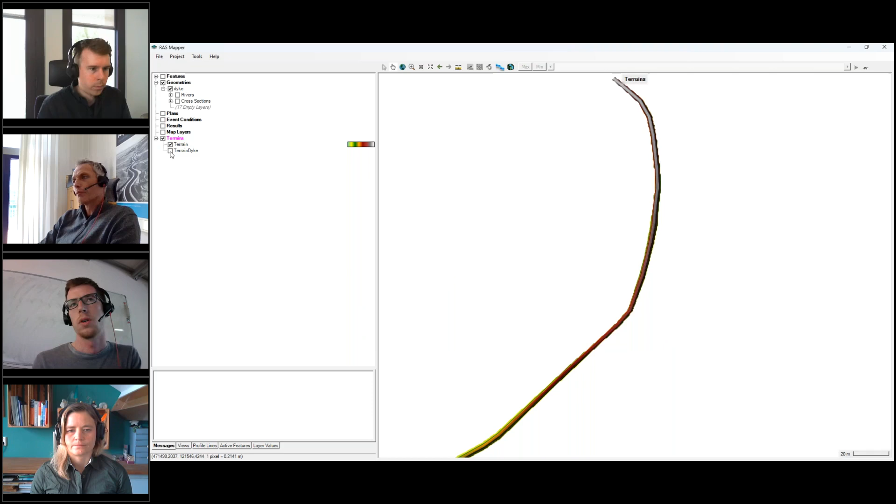But then if you want to join this to your existing terrain, you just go here, you create a new terrain, you select the plus button, you add dike, and you add your existing terrain, which is in our case some LiDAR data. You make sure that dike is above your basic terrain, and then you click create, and you will get something like this. So a terrain which also includes the dike terrain. So this is how you import the dike into HEC-RAS.

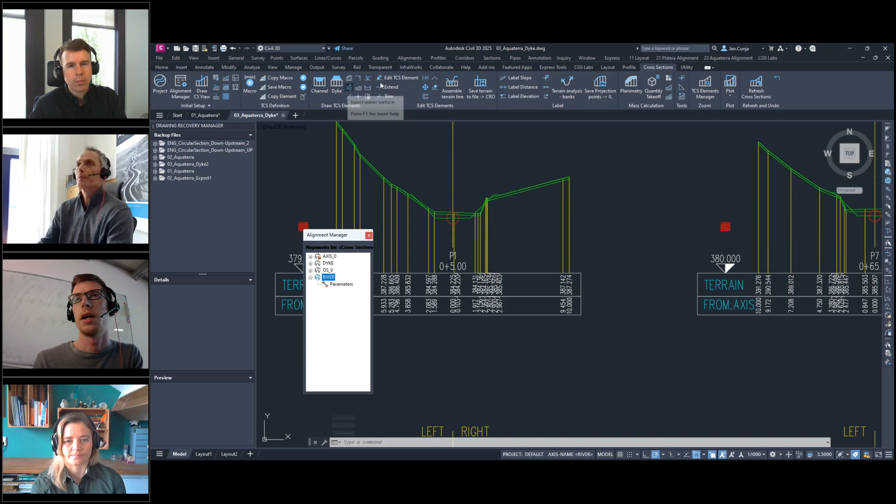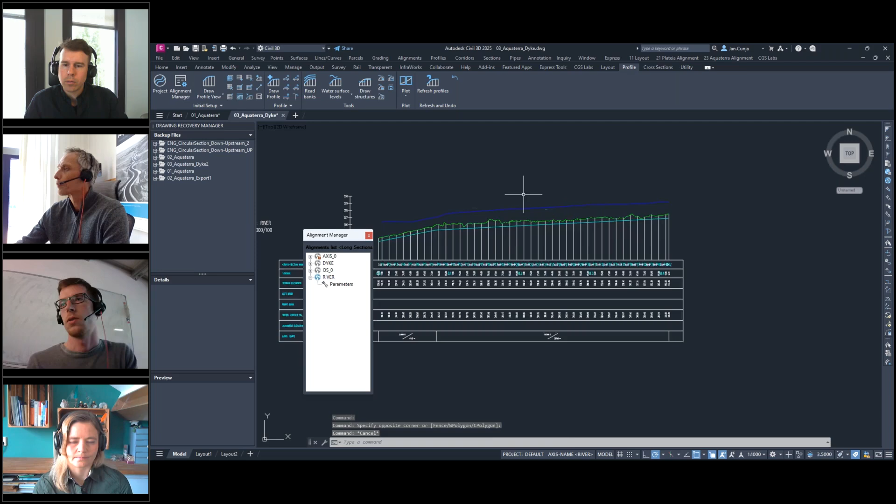Okay, so now the water surface level is imported, and you can also add it to the profile view. Surface levels. Okay, so now we also have it here. So this is how you can import the results back. And now let's see another thing.

We can also create a planimetry here and quantity takeoff analysis. So I will use a material and then define the polygon which I want to do the planimetry on. This one and this one. So again, you have to select the right alignment. Okay.

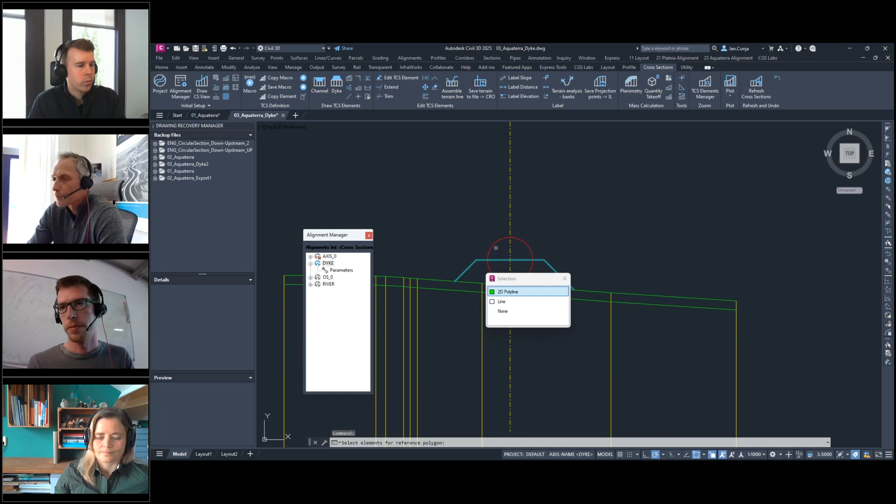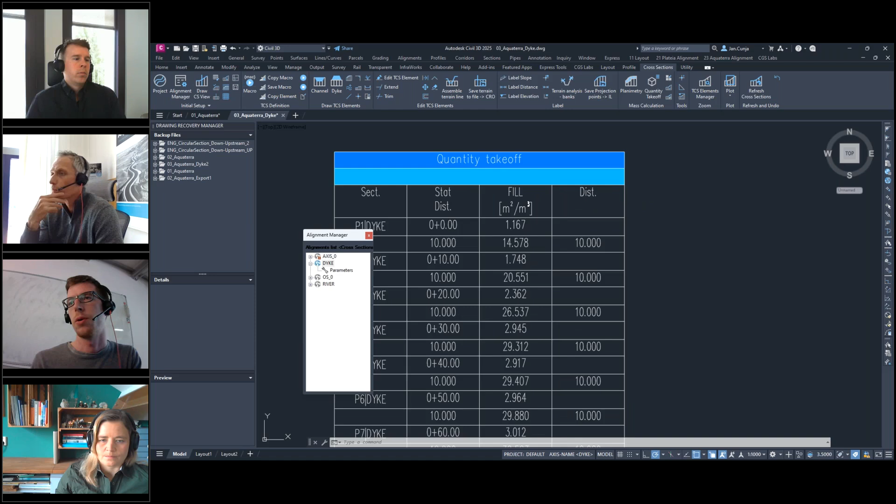And now we get the polygon here, and we can make a quantity takeoff. So we insert in the drawing the places of where I want those information to be imported. And now we have here the information of the fill material, quantity, and also I have a quantity takeoff table with all the quantities inside and also the summation of all the quantities.

So when you have this planimetry, it is very easy to create a 3D model with Aquaterra. So I will show you in the example of this dike. Or maybe let's go first like this. So you go to utility, and here you can also prepare some properties, your property sets. So this 3D model won't be only a 3D model, but also a BIM model. And you can add your own property sets here.

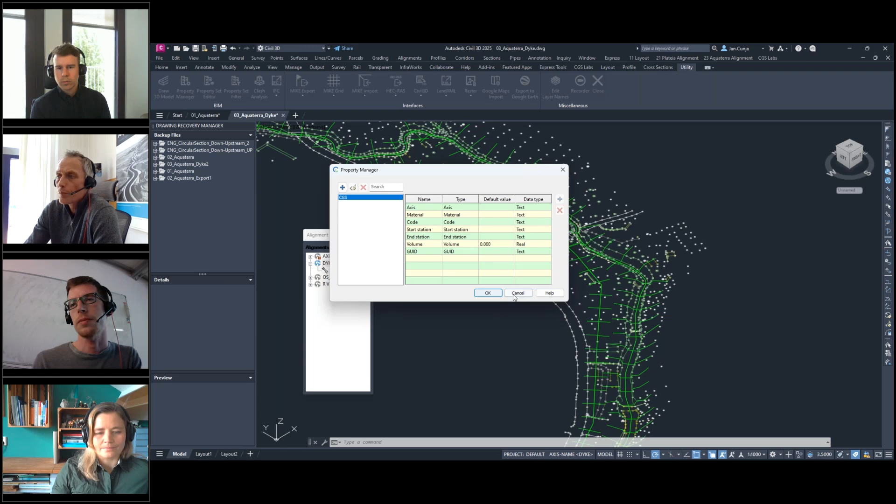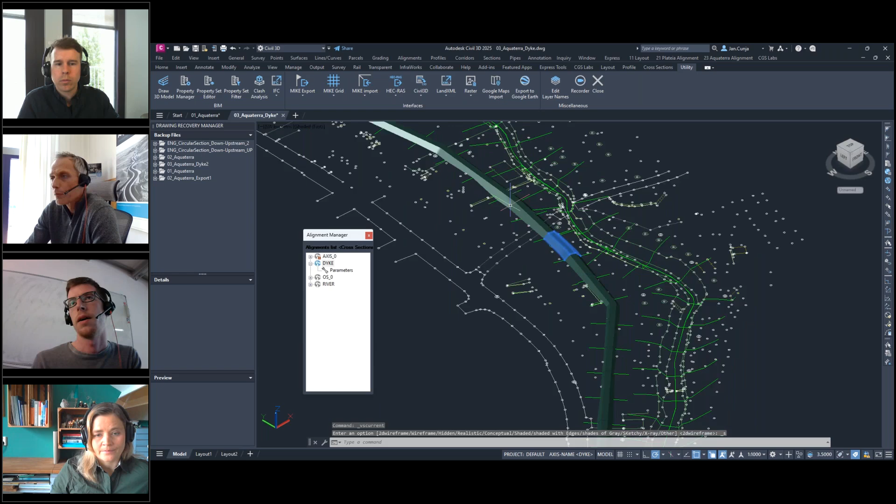And then when you go to create 3D model, you can select your property set table here. And then when you click OK, this 3D model is then created. Let's show it in shaded view. And now let's also add the terrain like this. So now you can see we have a 3D model of this dike, and we can also, if you go to utility here, you can also edit the properties on this.

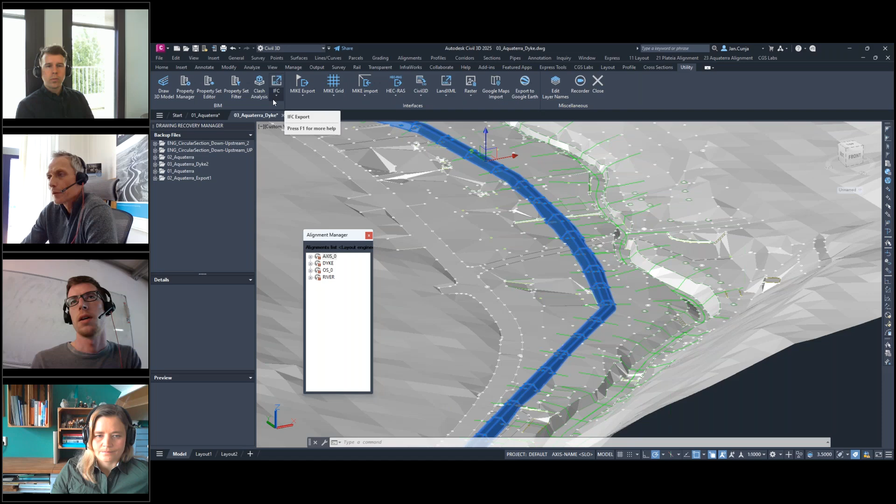You can edit the properties on these elements. As you can see, you get automatically the name of the axis, the end and start station, the volume, and the GUID number. But as I said, you can also add your own properties. Then you can filter the elements using these properties, and you can also do the clash analysis or export the model to IFC. So basically, this is all the things you can do with Aquaterra.